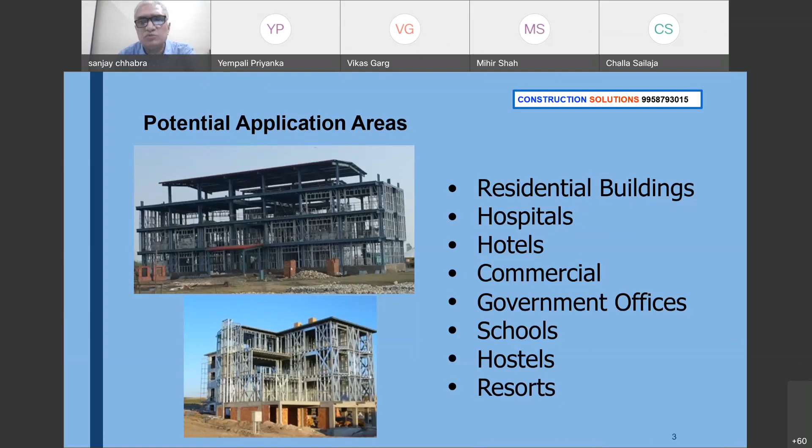If you see the technology users, for information, this technology is now very well defined in chapter 26 of the CPWD DSR, where you can go through all new technologies. Chapter 26 is basically kept for all new technologies. Earlier it was not there in the DSR. So many a times you had to go and push this technology to the people, to the government departments also. Now, over the period of time, when they have used this technology and found that it needs to be incorporated in the regular system, they have introduced this in chapter 26 of

CPWD DSR. BMTPC, that is the Building Material Technology Promotion Council, is promoting this technology. They approve this technology also, and many other new age construction technologies. In 2018-19, our Prime Minister introduced a Global Housing Technology Challenge for the dream project of housing for all by 2022. Under that, projects at 6 locations are already going on, using different technologies. Out of these, one of the technologies is this light gauge steel.

NTPC, NHPC, these are all government bodies. They have already used this. ONGC, OPGC, Life Mission Kerala. This technology came up in Kerala after the floods, I think 3-4 years back when there was very heavy flooding. So the government came out with this hybrid construction technology to use in their regular housing provision to their people, so that they get relief, because with this technology you can design your structures so that they do not get affected in floods. In low-lying areas you can have stilts. Individual houses cannot have stilts; that becomes very costly for them.

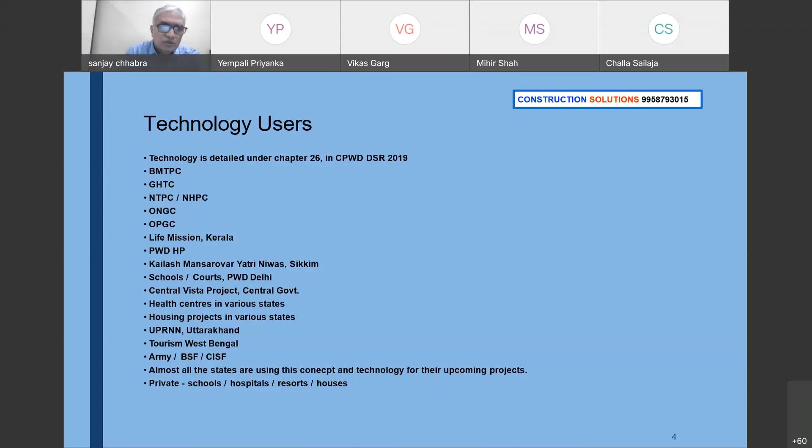We are offering our services as value engineering, as a consultant, as training and development of new and existing employees, and grooming engineers also, academia also, like the final year students, where they need immediate requirement for the industry skills. So that is one option.

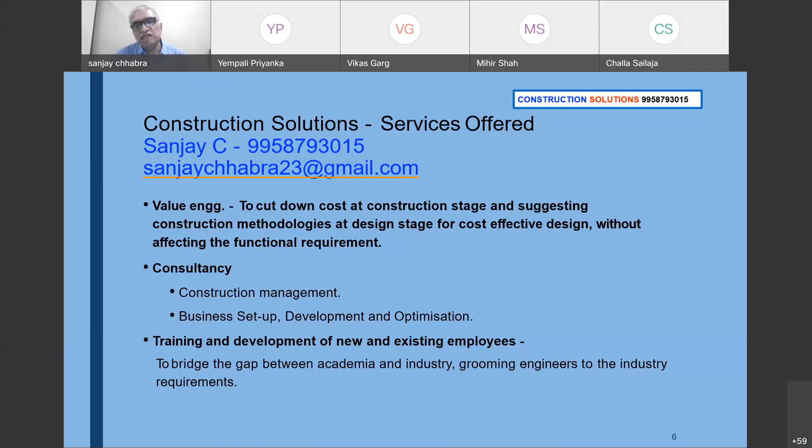So with the help, the students get a lot of knowledge about the industry on those particular subjects, so that when they go into the industry or they see day-to-day activities going on around them, they just correlate very easily to that. So moving forward, now we come again back to our topic of construction.

See, if you see construction, everybody knows it is a process that consists of building, assembling of various elements. It is multitasking work at site to complete a project. It is a major contributor to economic growth. It takes about 33 million of workforce, and it is next only to agriculture in employment generation also. One of the oldest industries.

If you see in the pre-independence era, normally the construction activities were confined only to small dwelling units, religious places, no heavy construction. Post-independence, the construction scenario has changed. It has expanded from villages to metropolitan cities, connectivity, infrastructures, railways, multi-story buildings, all these things. An increase in demand has resulted in shifting from one technology to another.

If we see, there was lime surkhi mortar to cement mortar to ready mix concrete, concrete frame. Earlier, there was brick only as load bearing, then concrete frame, then now steel frame. So over the period of time, things are changing and new technologies are being adopted.

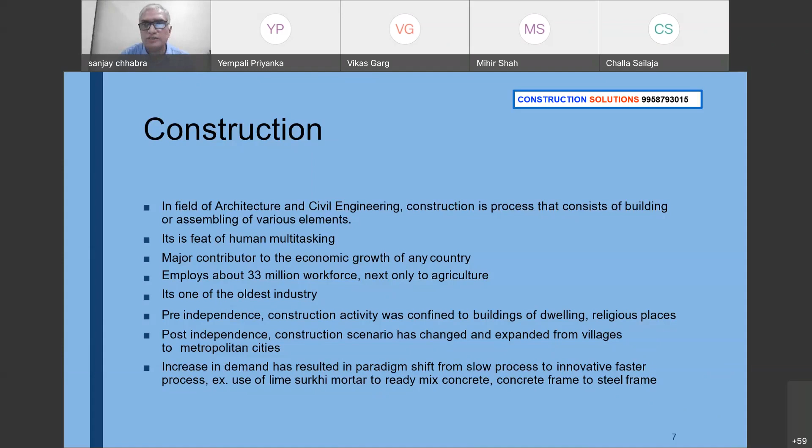Further understanding about this conventional construction, if you see, these are the basic components: strip footings or raft footing. There are types of footing. Then columns, even for very high structures. Then the intermediate slabs, called floor slabs. Then on the top, roof slab.

Then there are other components also to finish this total building, like finishing items, doors, windows, electrical, plumbing, flooring, glass work, woodwork. So a lot of things are involved. The fee itself is 4%, and this we have divided, and it can be slightly varying also. Somewhere it may be 7%, somewhere 7.5, it may be 8 or 9 also. But these are the basic components.

If we see the total breakup, layout and excavation. You require water, 1% of the total cost of the project. If you consider a 100 crore project, 1 crore of requirement is of water only. But if you go to steel construction, you will see that it is almost a dry construction.

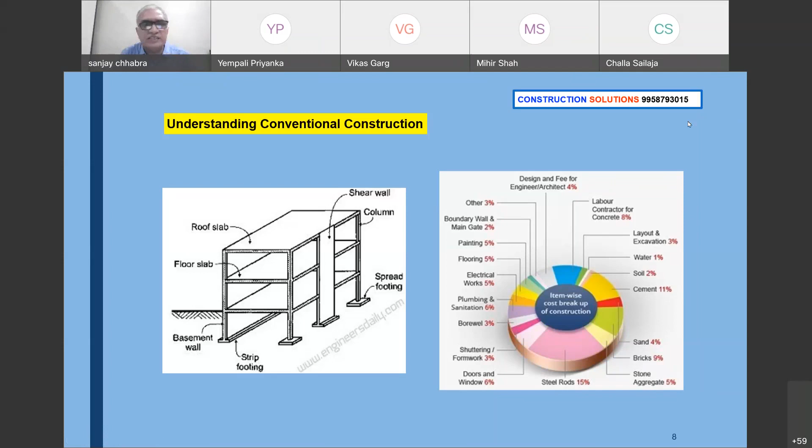Then soil, cement, sand, bricks, stone aggregate, steel rods, doors and windows, shuttering formwork, even bore wells are required some places, plumbing and sanitation, electrical works, flooring. So if you break up this total structure, it comes out to be so many activities. And basic construction materials, everybody has seen: cement, reinforcement steel, bricks, aggregates, sand, water, wood, and all other associated items required for completion of construction.

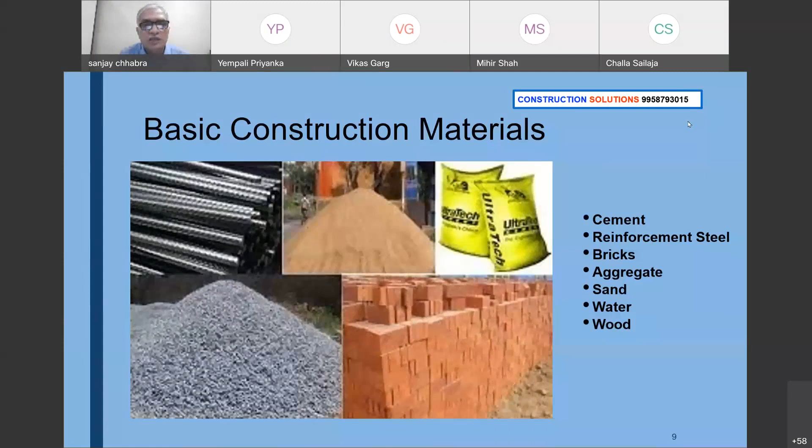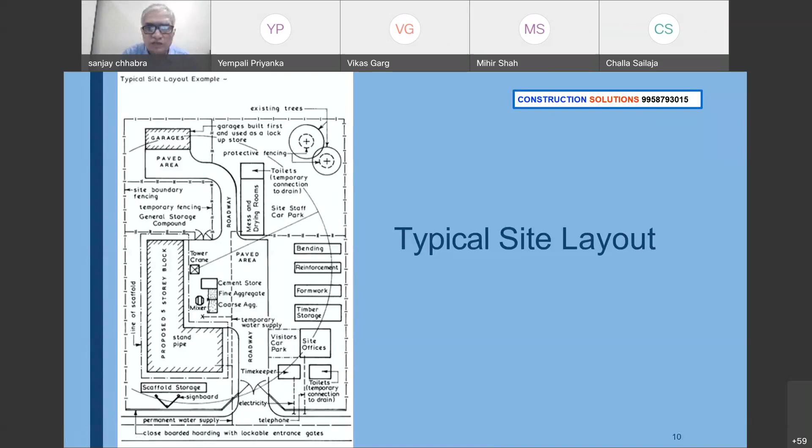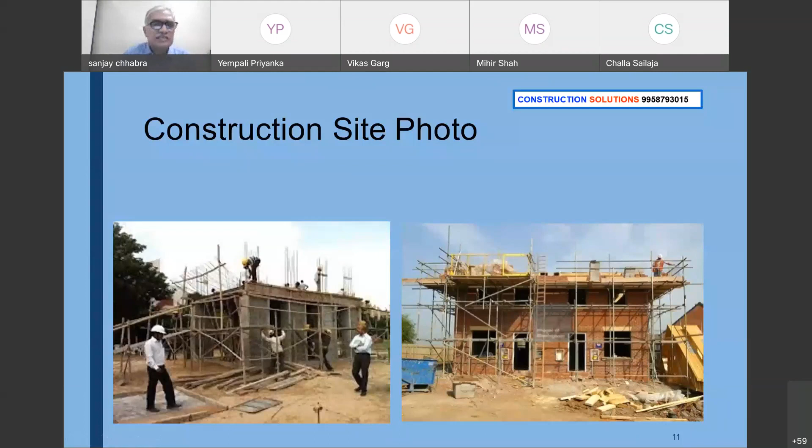So with these few things, we can say that conventional construction, see, it does not mean that conventional construction does not have a value or conventional construction has come to an end of the road. No, but wherever there are public projects, cost is the major component. There, still, conventional projects are being done in the conventional construction way.

It is time consuming. They require high energy consumption. They are polluting. Nowadays, if you see in cities like Delhi, every now and then due to pollution, the first major impact on the stopping of industry comes to construction. You stop the construction activities as if they are the only polluting industry, but it is a polluting industry because a lot of cement, sand is being used, a lot of movement of vehicles is there. So there, if you see, a lot of pollution generates.

Non-eco-friendly, because we are using only materials. We are not replenishing it. Mining is going on, but how we are going to replenish it? Nothing. So we are just excavating. High water consumption. It is not only at site. A lot of water is used for the reduction of your pollution.

Nowadays, it has happened. Every now and then, you have to engage a tanker on the road, on your site area, so that whenever there is a vehicle plying, it does not pollute the environment. It is creating ecological imbalance. What I have said is we are just doing a lot of mining work, and it is creating ecological imbalance, and warming up is happening in the whole earth.

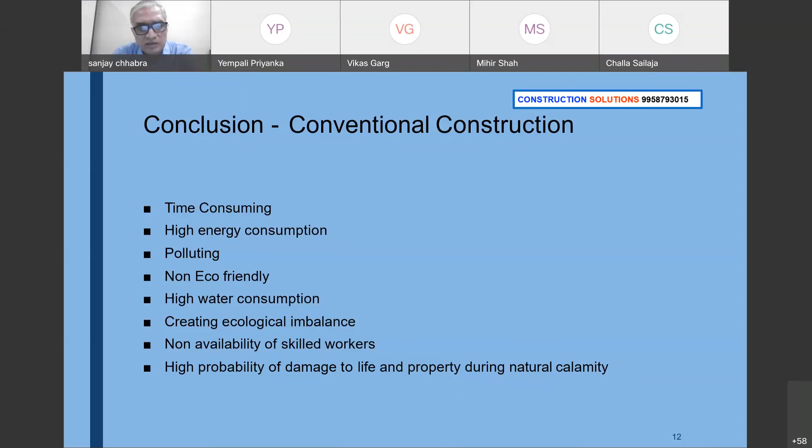High probability of damage to life and property during natural calamity. In conventional construction, we have seen when natural calamities happened, the life and property damage is very huge. It reminds us of all the earthquakes which have happened in the past in Gujarat and all other places also.

Now why are we promoting steel? Why are we looking for alternative options? Because steel is eco-friendly. Eco-friendly means it is recyclable. It can be reusable. And if you see very high-rise buildings, any high-rise buildings in residential areas also, when going beyond the limit of the RCC design, you have to go for steel buildings, maybe covering up that steel with civil concrete structures. So it can stand as a hybrid structure with the steel as the core, and then cover up the steel using normal concrete. But the requirement of the concrete reduces.

Less job site wastage, greater recyclability, accelerated building schedule; one third of the time savings are there. Even more can be done when we are designing the steel buildings. It has reduced water consumption at site, practically going for dry construction. Only up to foundations you require some water. Otherwise, on top of that, it is mostly a dry construction type.

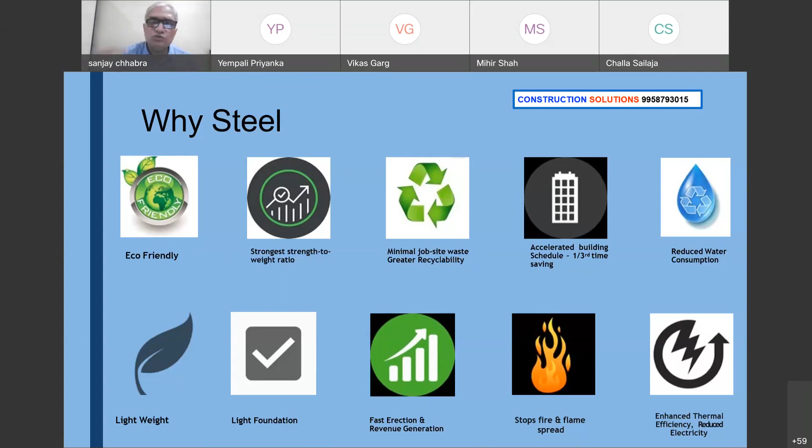Overall, it is lightweight because it reduces the weight of the foundation also. That gives light foundation, faster erection and revenue generation. It stops fire and flame spread also if properly protected and the treatment is done at site. Enhanced thermal efficiency and reduced electricity are also being seen in steel buildings when they are used with proper insulating materials.

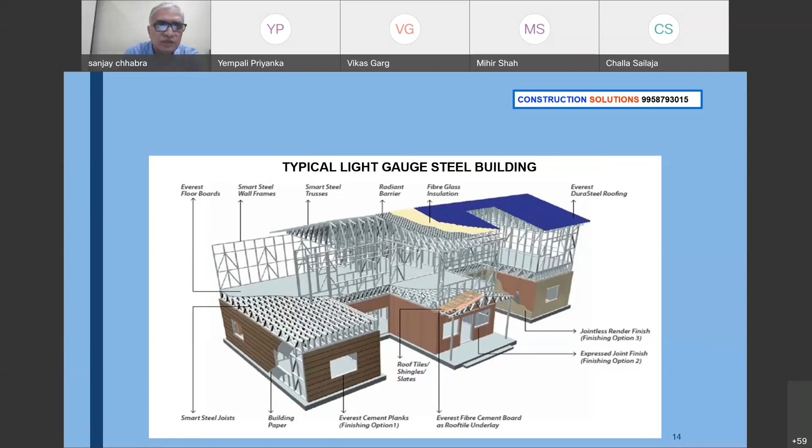This is just a comparison for small buildings. Of course, for very high-rise buildings where we have talked about hybrid construction, definitely all design requirements are followed as per the IS codal provisions only. But if you go for small buildings, as we are talking about, steel building proves to be light. Still we have to go for either spread footing, all this type. Construction time reduced. Construction is always neat and very easy, and assembly at site only.

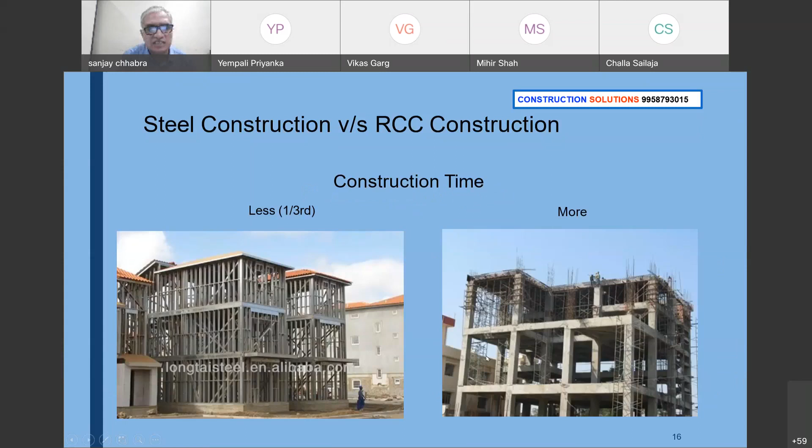But this requires more time because it's a stage construction. With the foundation, you can see other components manufactured is complete. You can just simply erect the top of the structure. Labor requirement is less. More labor is required for civil construction. And even in this pandemic, if you see, this is a major boom construction. Major of the projects conceived in steel because most of the things are made, and then you have to come to the site with all those components and assemble it and do the construction.

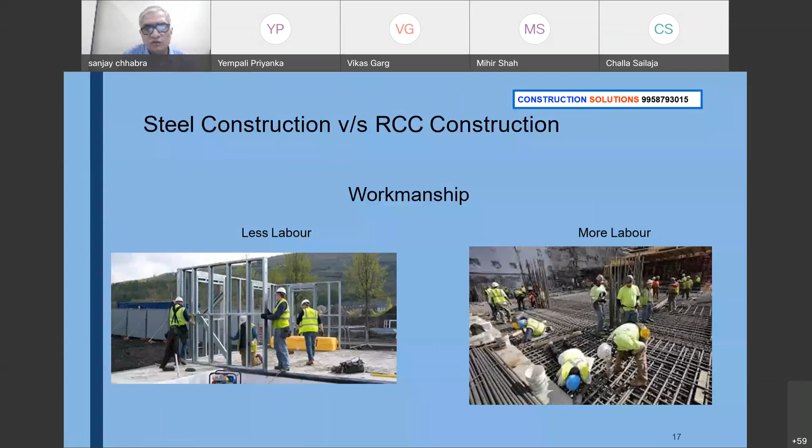Less labors. Water requirement, we have said earlier also, not required, only up to the foundation where you need to do some curing and everything. Otherwise, in normal civil construction, till we finish the top of the structure, we have to keep on doing curing, and that whole water gets actually wasted when it runs down to the ground.

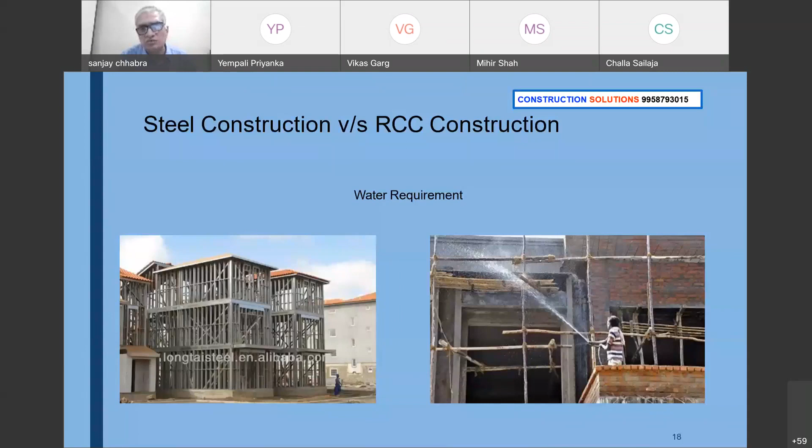Reactions, if you see steel components, these are all very well knit together components, and during seismic activities they behave in a much better manner than normal construction. I don't say that civil constructions are total failures, but many places in very high seismic zones, when the disaster struck and the building gets damaged, the loss to human beings and property is very huge.

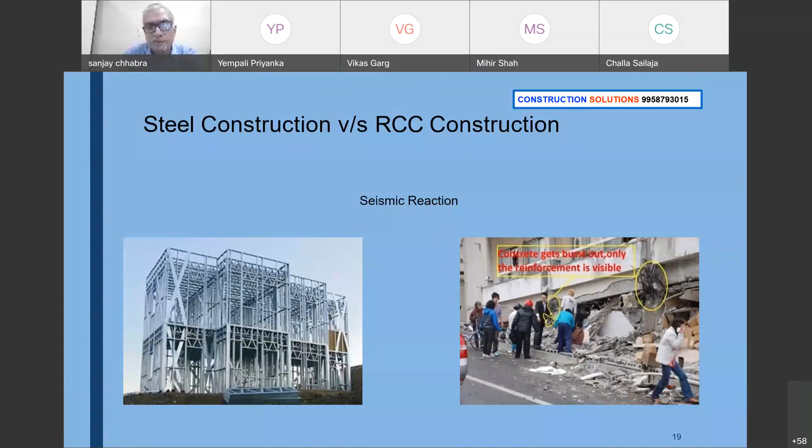So, once the structure gets heated up, it takes a lot of energy to cool it down. And once again, when it has cooled down, it takes a lot of energy to heat it up in winter. But in steel constructions, at every stage, insulation properties play a major role. In the wall component area, rock wool is being used. Again, on the rooftop, either glass wool or radiant heat barrier is used as an insulating material. So that helps in having better insulation properties in the steel building.

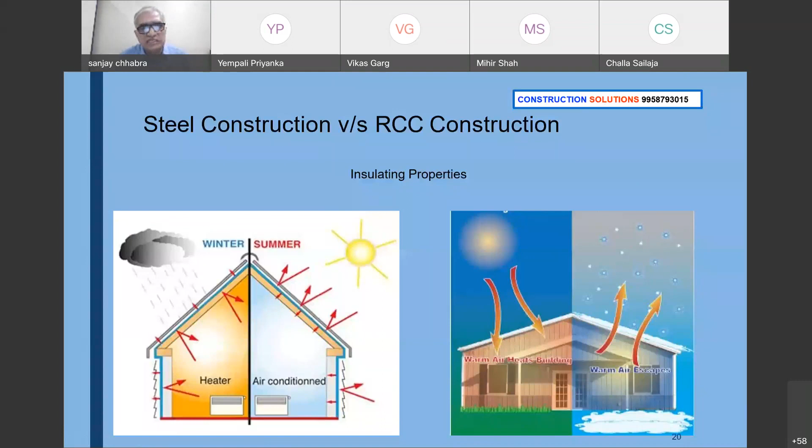So if we summarize all these things, if we see the cost, initial cost is a little bit high because a lot of steel is being used as a frame, but it gets offset by the construction time and durability. In RCC, the initial cost seems to be less, but it's very time consuming. Water consumption is less, here it is much more. Sound insulation in steel, by using better insulating material, we can even design more than 38 dB. But in RCC or brickwork, we have to keep on adding material on top of that.

That increases the weight and space also. Construction time is 1/3 of conventional, so 1/3 gets reduced compared to conventional construction. It is a long duration benefit. Fire protection is also better, since the steel gets totally covered with other materials that are fire retardants, like fiber cement boards.

Future expansions, if properly thought of beforehand, are easy. But in civil construction, it becomes very tedious.

This is eco-friendly, less polluting, whereas civil construction is more polluting, and steel is always recyclable. RCC construction, earlier, used to be totally non-recyclable. It was used only for filling some low-lying areas. But slowly, people are now trying to use some of the RCC coming out of large projects.

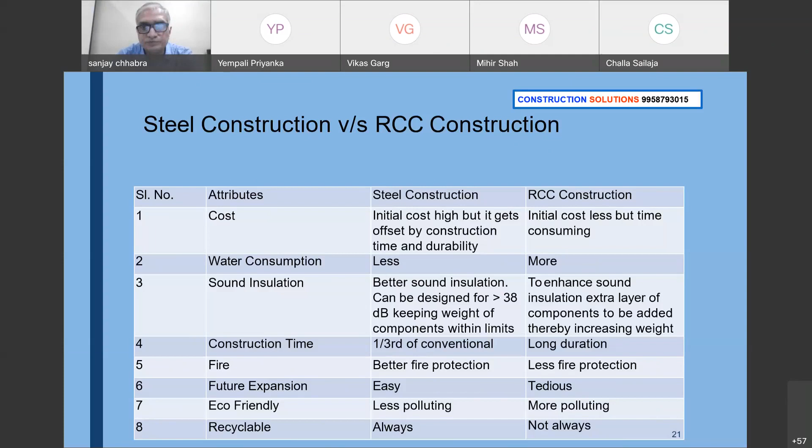Now we talk about cold form steel. So we have CFS also, in short form, we talk about it. It's made from sheet metal. And in India also now companies are making it, Tata and Jindal and all. Earlier it used to be brought from outside and made to shape.

This solid steel is passed through a series of rollers and then pressed into thin sheets of specific thickness, strength, and physical properties as per requirements. The sheets of steel are then sent to a continuous hot-dip process, which is a metallic coating of zinc and aluminium, called galvalume.

Normally, we see these kind of thin sections in the market also, and we've even used them in our day-to-day civil construction, like false ceilings. They are not using just zinc; galvalume provides much better properties against corrosion than only zinc sheets. They are rolled into master coils and bent, and the production is done.

All the panels start with joist steel shaping. If you take this experiment even at a younger age, or for teaching purposes, to show how different shapes take better load - if we have a small cardboard, say about 0.5 mm cardboard, or even an A4 sheet of plain paper, and you just put that plain paper between two supports and try to put a load on it, it will not be able to sustain any load.

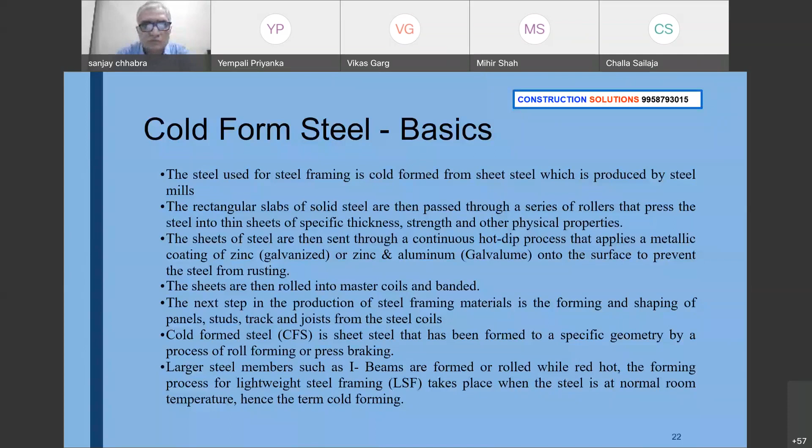Am I audible? Am I audible? Yes, sir. Yes, sir. Yes, sir. Okay. Okay. Thank you. Thank you.

So now we will see the step-by-step procedure for light gauge steel frame construction, where we get a general arrangement from the architect - whoever wants to construct this has to have a general arrangement drawing made from the architect.

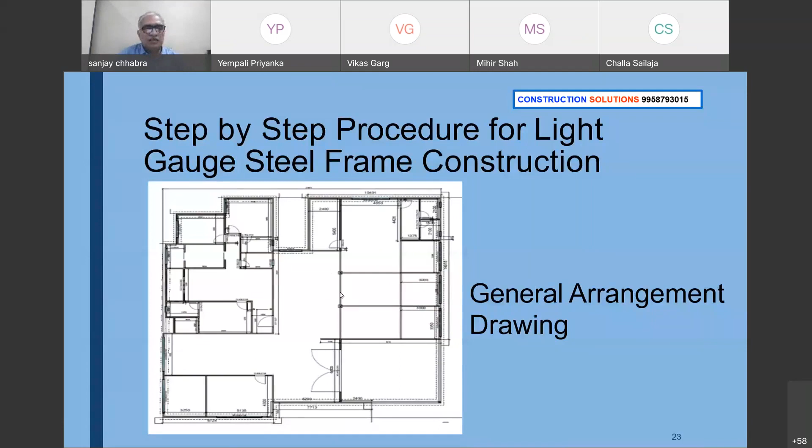Once this general arrangement drawing is properly fixed and done, then we have to go for the decision of the elevation also - what kind of elevation we require for this particular plan.

Once these are decided, then the light gauge steel frame construction using this GA and elevation details, CAD drawings of LGS wall joists and roof trusses are prepared. I want to add to your knowledge that in India, as of now, normal steel code is being used for this kind of light gauge steel frame construction. The companies providing the machines for this kind of framing have their own proprietary design standards as per their area.

They have done all the research and analysis, and software is provided with that. In the last 10-15 years, as more projects were done in India and taken for vetting to the IIT, those people have seen how it correlates with the codal provisions of other countries, and what factorizations have to be changed, added, or reduced. Based on that, these are all designed using those software machines.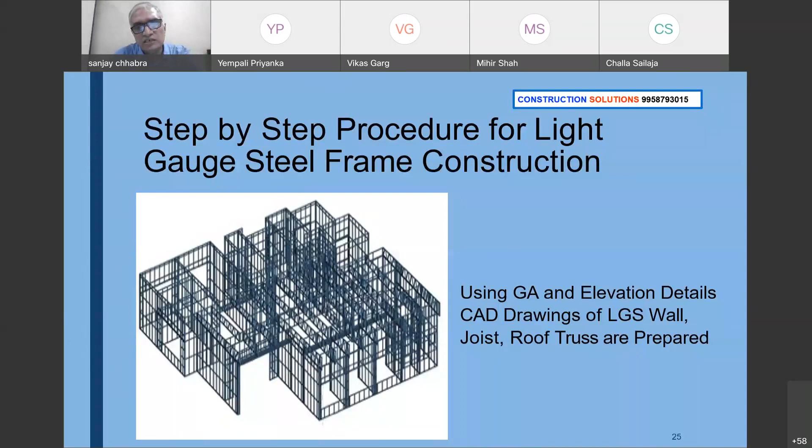Normally, whichever company provides the machine for framing also provides the software. India is in an advanced stage of developing a code for light gauge steel frame. But still, using STAAD and other software directly, buildings are being taken up, and that is acceptable in the industry.

If you see structures like light posts on the road, they are also cold formed steel. They are not taken as small plates or welded. They are cold formed into shape and then tack welded in place to make it 100% circular, hexagonal, or whatever shape is needed.

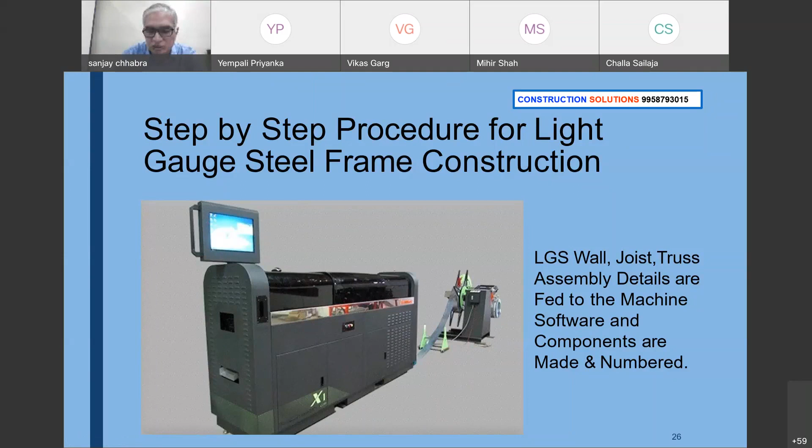Here you just put the command into this machine - what number of segment you are making, whether it is wall or truss, it's all fitted into that. Then you just click, just like we do with CNC machines. All these things are packed and then transported to site.

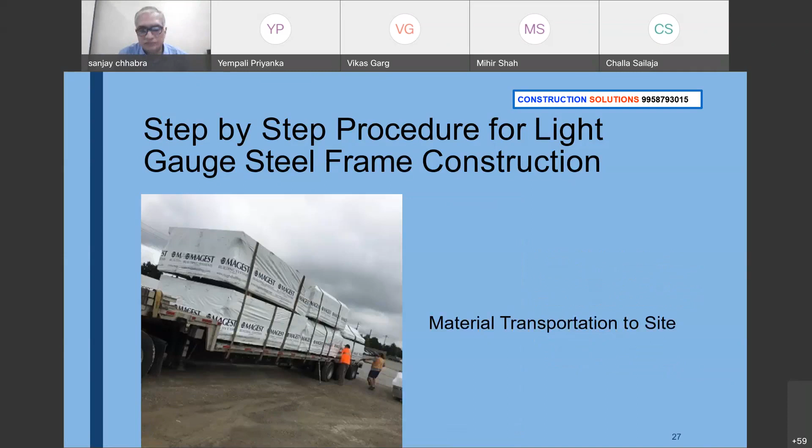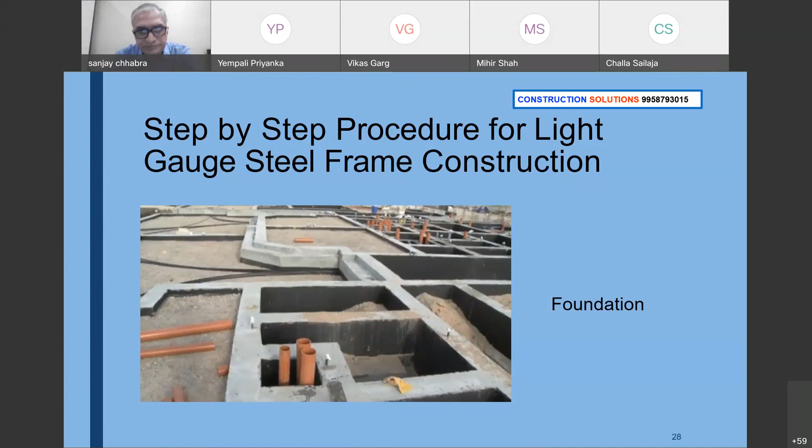On-site assembly and erection is done, and things are made very easy.

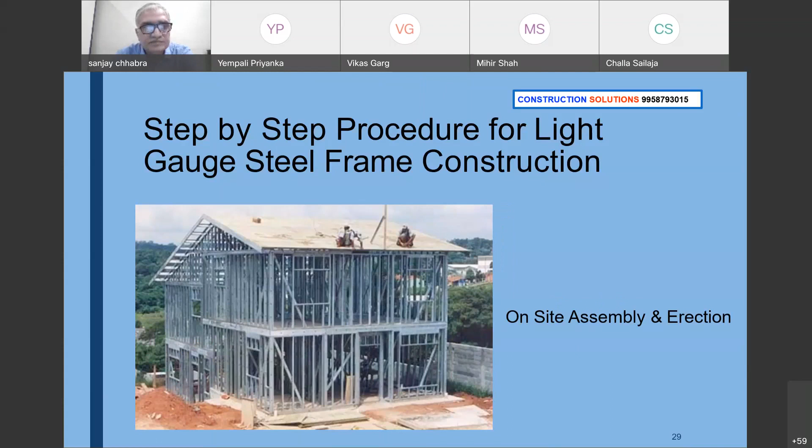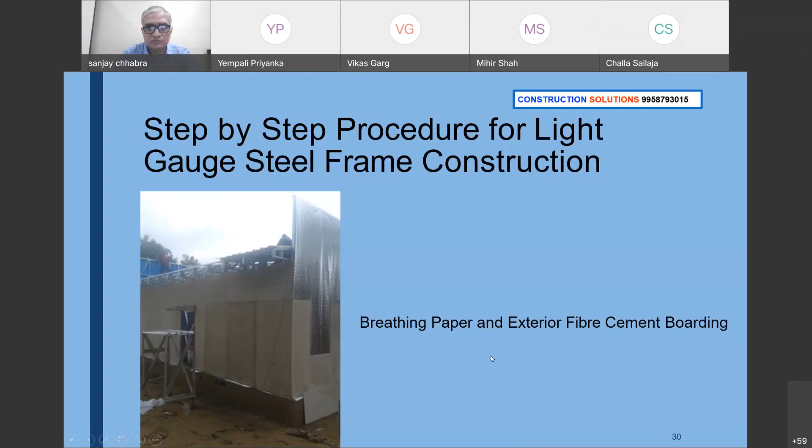When you do all this work, there is no chipping required, no chiseling required. So there is no wastage of material or accumulation of waste at the site.

The only thing is, before plugging these services inside, we have to properly check them so we don't have to reopen and rectify it later. Like our plumbing lines need to be checked for leakage so that it does not become a nuisance later on. We check this even for normal construction, brickwork, and other things too.

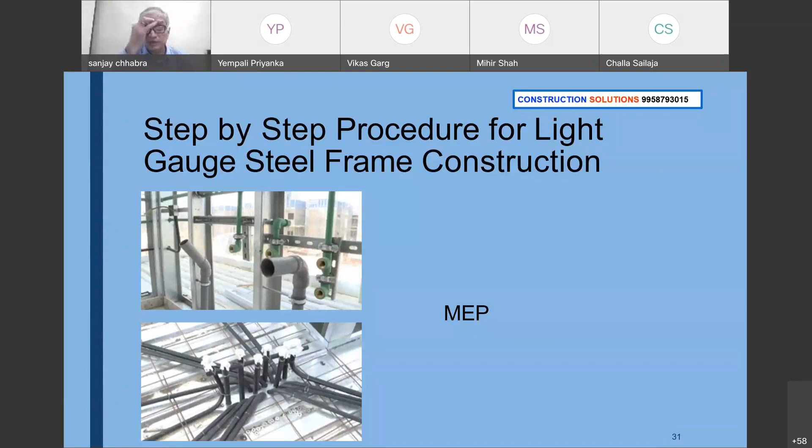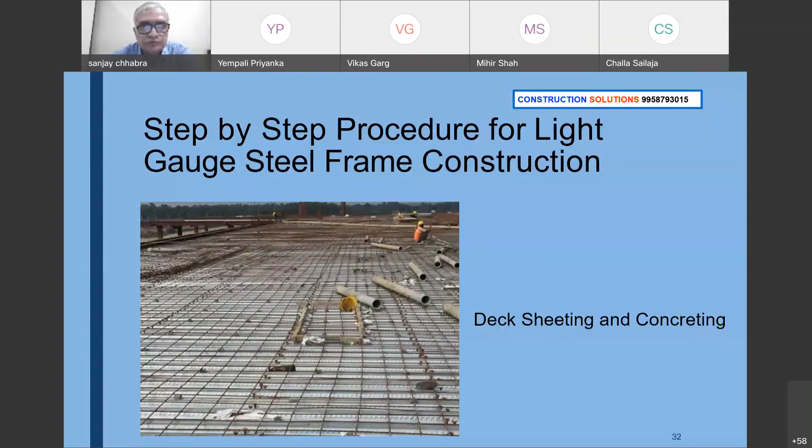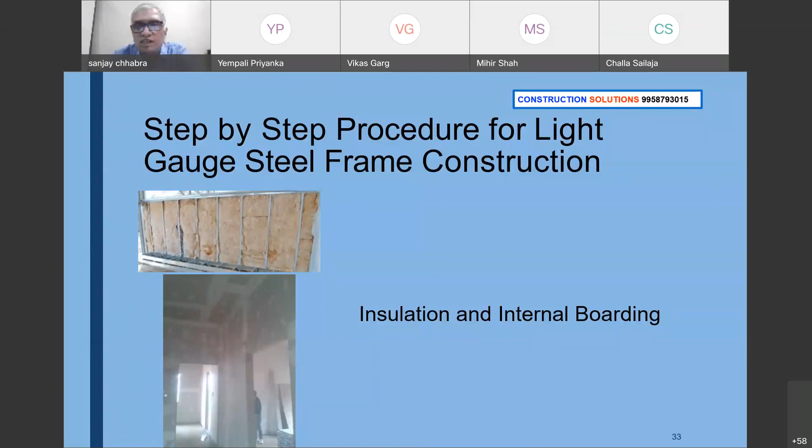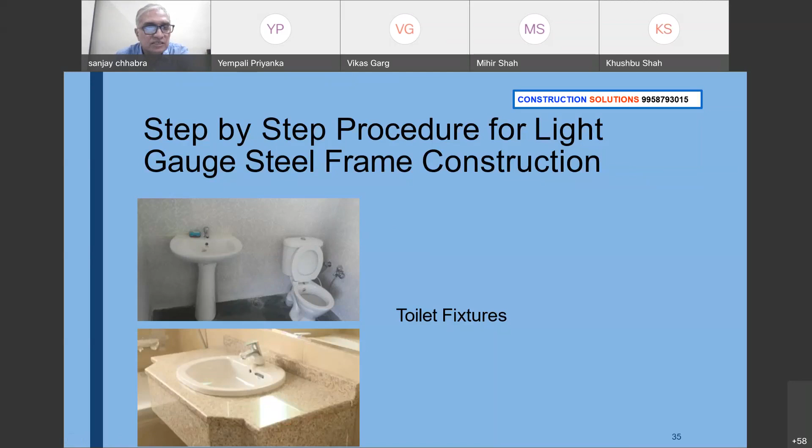I have talked about revenue generation and the cost of return. Staff had to come from as far as about 50 kilometers from the nearby city, so they had to stay on rent and needed a transportation system. Putting it all together, after the cost analysis, instead of going for regular civil construction, they decided to go for this technology to reduce the cost of accommodation and transportation for their key staff. Later on, for whatever colony they make, they can decide whichever way they want - this technology or regular construction, depending on budget. But initially, for the critical and major staff, they provided this type of housing to save on overall cost.

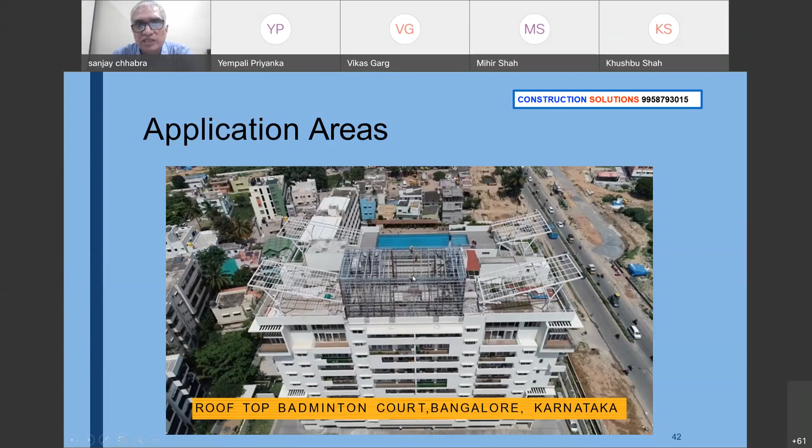So they zeroed in on this technology, and the planning was done in February, March itself, so when the school was closed for holidays, they handed over in April, May. By the time of the new session in June, they were ready with these classes. So it was all done.

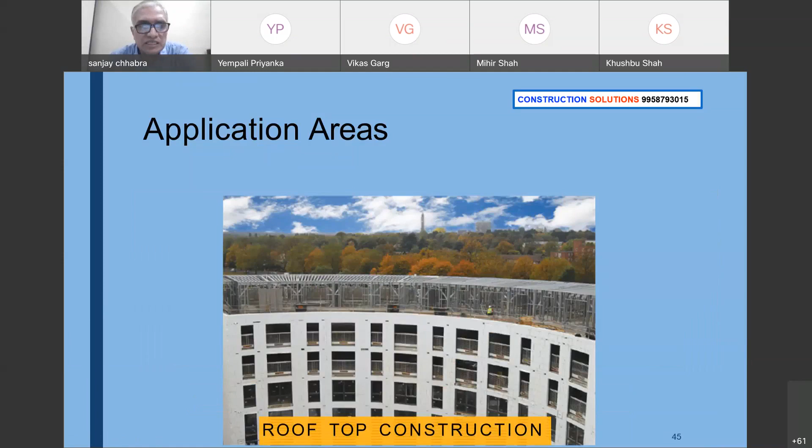It was again almost 8 to 9 years back, when they had only 9 to 10 months to open it, or otherwise it could have shifted by another 1 year if they had gone for regular construction. So they thought of what kind of construction to do so that they could have the college running, and side by side do other construction also, and these structures can still be used for their whole lifetime. So they again adopted this kind of technology.

A few of these structures were done hybrid, where the mainframe was done with hot rolled steel, and partitions were done with light gauge steel, and hostels, and these structures are still surviving and being used by the staff over there. These are a few application areas.

Admin blocks can be done, farmhouses can be done. Opportunities are everywhere. Any construction can be done using these types of technologies. There is no place where we cannot adopt these kinds of technologies. Villas, individual villas. It is very common in foreign countries. Slowly it is coming up in India also.

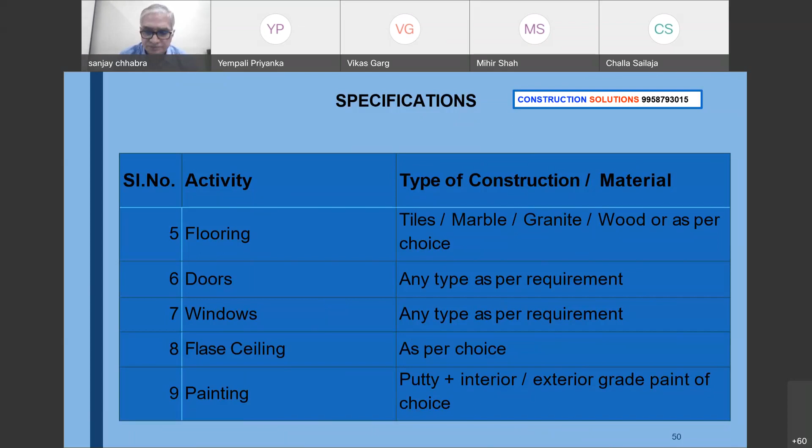But nowadays, in many places we have noticed fiber cement board with a wooden texture face being used, giving a wooden finish on top. Painting is again putty, interior and exterior grade paint as per your choice. Joint fillings are done. Electrical, as we have shown in the drawings, can be concealed in walls through slots, and support for junction boxes is provided. Plumbing and sanitary, again concealed in walls through slots with back support as and where required.

Tested before walls are closed. This is very, very important. In any case, whether it is RCC construction or whatever it is, your sanitary and plumbing are to be tested to avoid any later leakages; many times a structure gets a shabby look just because of that. HVAC: window, split, centralized as per the design. If it is bigger commercial units, centralized units may come, and split units and window units can be placed at any point of time. They are not of much weight.

Wet areas: waterproofing is done before the wall tiling is done. And nowadays, companies are specifically providing waterproofing material and wall tile fixing material for these kinds of applications. Even in conventional construction now, the use of cement is getting reduced. They are now going for wall tile fixing agents, which are much more durable and have a better life.

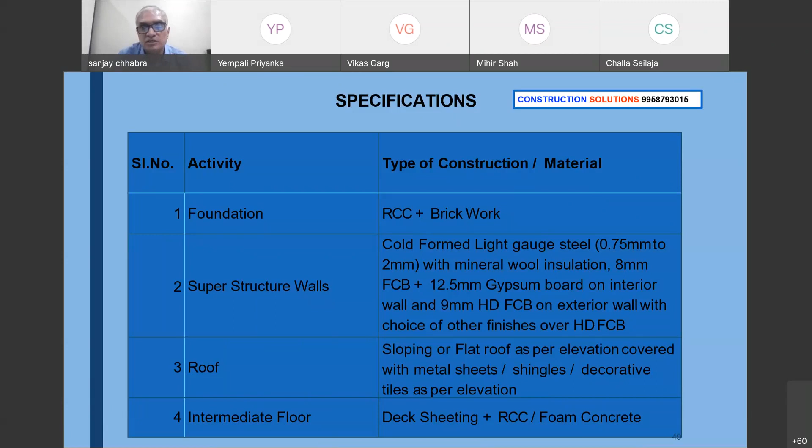Now, if you see all these areas, our activities have drastically reduced. If we had gone through normal construction, the superstructure itself would have come with a lot of activities like the RCC frame, brick walls, plastering work, in the roof itself shuttering, staging, scaffolding, exterior plastering, interior plastering, roof plastering. All these activities have now reduced to just these two activities, and this makes the major impact on the construction time itself. I will show you one example.

Last year, when the pandemic started and everybody was looking at COVID hospital constructions, there was a query from Mumbai. It was a plot area of approximately 500 square meters, G+1 storey. With design approvals and everything, even at a very fast pace, it would have taken at least 4 to 5 months, and it would still remain wet construction, because curing and drying take a lot of time. But when we did this analysis and provided the solution, we took 15 days for all the activities.

Final design and approval, maximum 5 days, and within that, 10 days for construction. The procurement and fabrication of mild steel or light gauge steel was all done in the factories, before the actual construction in week one at the site. For transportation of panels, here we used Repicon panels, slightly different from this light gauge steel frame. But to reduce cost, and since Repicon panels are always readily available with the companies, they were chosen.

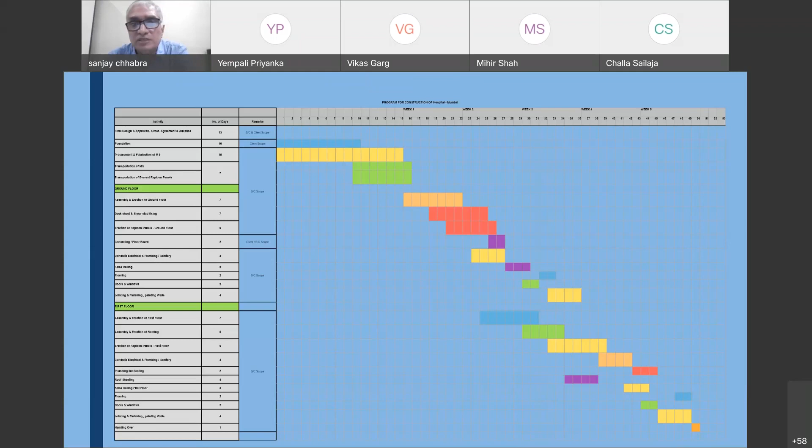And just to conclude the benefits of this: they are earthquake resistant, better sound insulation, better wind resistance, heat prevention, durability of the structures is good, environmental conservation, because we are doing a lot of reuse of materials. Even in making this fiber cement board, a lot of the raw material used is fly ash. Cement is a small component. Fly ash is used, paper pulp is used. So these recycle the products which are available; the raw material is your wastage.

Fireproof. They are tested for fire ratings for different categories, from 30 minutes to 2 hours to even 3 hours, 4 hours, according to the requirements. Energy conservation is there because of better insulation properties. HVAC load gets reduced in the building, lesser electricity bills, less labor cost. Of course, the material cost is slightly high, but when we go for mass construction and better turnaround, it becomes cost effective also.

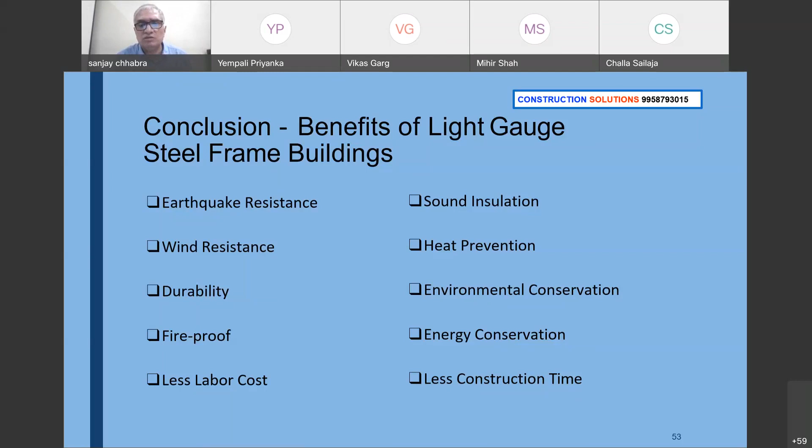Only thing is you have to keep an open eye. You might have seen very heavy steel construction in bridges, mostly ROBs, railway over bridges, and all these things, because there is a compulsion sometimes. So now go for these types of buildings, and also promote these kinds of buildings.

And there are business opportunities also. Why are we showing these business opportunities and requirements here? Because, you know, people who want to do something in life, who want to promote these kinds of technologies, sometimes face barriers about whether this will be a real solution or not, until and unless you get confidence, unless you get a lot of support materials.

So the industry size is very huge. It is increasing exponentially for residential by using hybrid technology. Civil contractors are collaborating with technology providers, so they then get the know-how of the technology. You need not put these machines up immediately. You can outsource

from the market. Just like in civil construction, a contractor does not put up a crusher plant. They sometimes put up a batching plant for the concrete mixing, but not the crusher plant. Crusher plants are only placed when there is a very, very huge requirement. So for these kinds of materials, there are a lot of suppliers in the market. So you can make them your technology provider. They will design, they will provide the whole frame structure, and all finishing items can be done by the civil contractor because they know it.

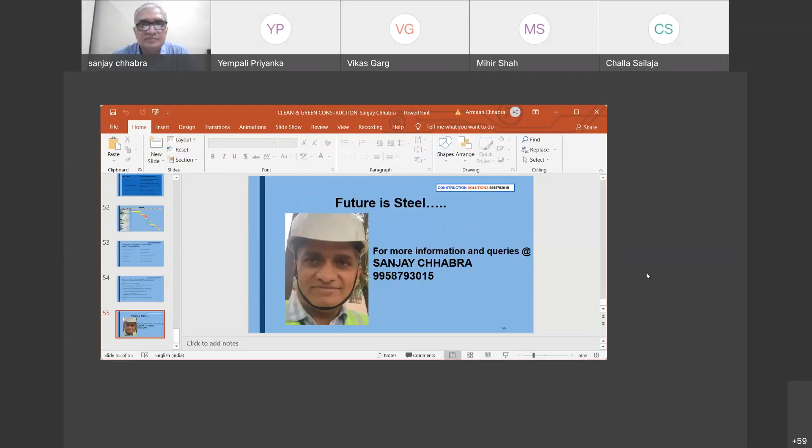Over to you, Priyanka and Vikas sir. Hello. Yes, sir. So it's really a very wonderful session. Is anybody having any questions? Participants? My request to participants is, even if you have any kind of question in terms of construction, some doubt or queries, they can ask. No problem. I will try to see if I can answer your queries. It can be any question. Please ask if you have any query. Don't worry about the quality of the question. Doesn't matter. The only thing is a question should be there. Please ask if you have any question in your mind.

Dubey sir, Mukesh Dubey sir, are you here? I think he must be busy. He must be busy with his homework. Otherwise, he is taking interest in all the sessions. He is always asking questions. He is always trying to understand the things. Priyanka, anyone?

Sir, are all the audience from your own college? No, sir. From all over India, sir. All over India? This is a faculty development program. It is sponsored by AICTE, All India Council for Technical Education. Okay. And this time they have approved 1,000 workshops. Faculty development programs in the online mode, they are sponsoring it. Under Atal Mission.